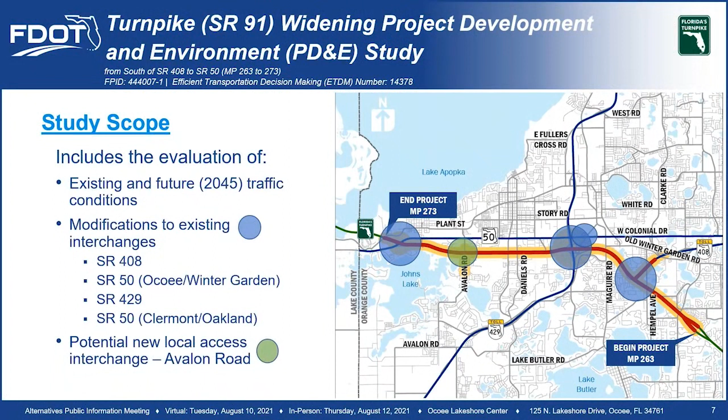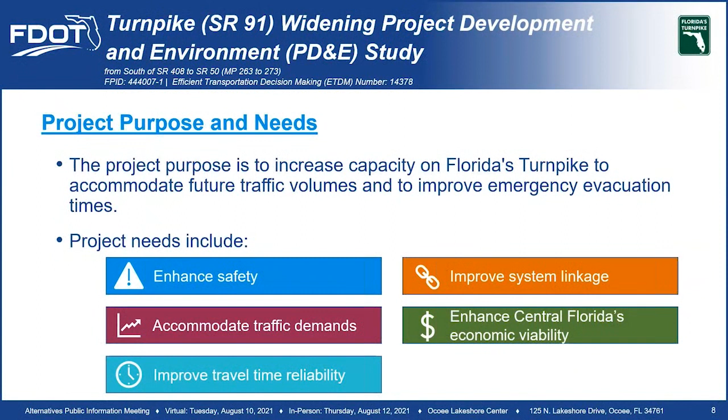The purpose of this project is to increase capacity on Florida's Turnpike Mainline from south of State Road 408 to State Road 50, to accommodate future traffic volumes generated by anticipated growth in Orange County and adjacent counties, and to improve emergency evacuation times. The need to improve this section of Florida's Turnpike is based on improving safety, accommodating traffic demand, improving travel time reliability and system linkage, enhancing Central Florida's economic viability, and enhancing emergency response and evacuation.

Now we will cover the proposed Turnpike Mainline widening improvements. The mainline improvements were broken into three unique sections.

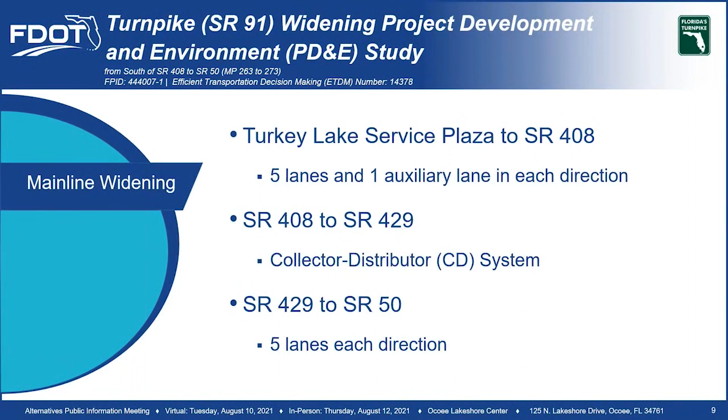The first segment extends from the beginning of the project near the Turkey Lake Service Plaza to State Road 408. The second segment is between State Road 408 and State Road 429. The last segment is from State Road 429 to State Road 50. The next slides will explain the proposed typical section for each segment.

The proposed improvements for the first segment from the Turkey Lake Service Plaza to State Road 408 include 5 through travel lanes and 1 auxiliary lane in each direction. There are currently 4 through lanes in each direction on this stretch of Florida's Turnpike, so the proposed improvements would add a total of 2 lanes in each direction.

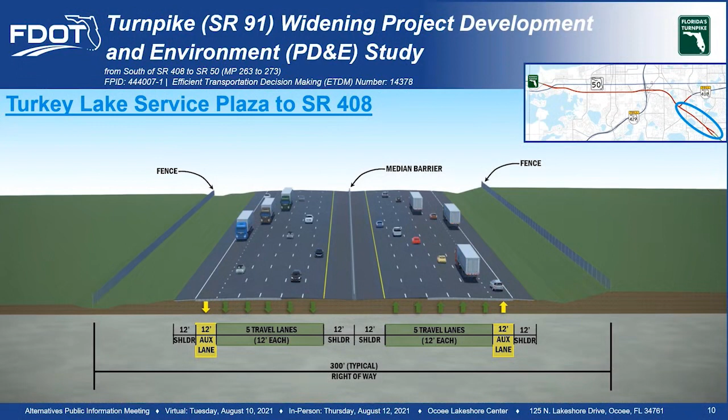For the second segment, from State Road 408 to State Road 429, a collector distributor or CD system is proposed. The CD system is a separate roadway facility that will parallel the Turnpike main line between the State Road 408 and 429 interchanges. The purpose of this separate system is to move the weaving movements associated with interchanges off the high-speed Turnpike main line, which will improve traffic operations and safety.

Traffic going to either State Road 408 or State Road 429 will use the CD system, which is comprised of an additional 4 lanes in each direction. These lanes will be barrier wall separated from the regular Turnpike travel lanes.

In addition, the Turnpike main line will be widened to 5 lanes in each direction to serve the regional traffic passing through this segment. For comparison, this section of Florida's Turnpike currently has 4 travel lanes and 2 auxiliary lanes in each direction, so the proposed improvements add a total of 3 lanes in each direction.

The next 4 slides will highlight the revised travel patterns associated with the State Road 408 to State Road 429 system and the interaction between the main line and the collector distributor system.

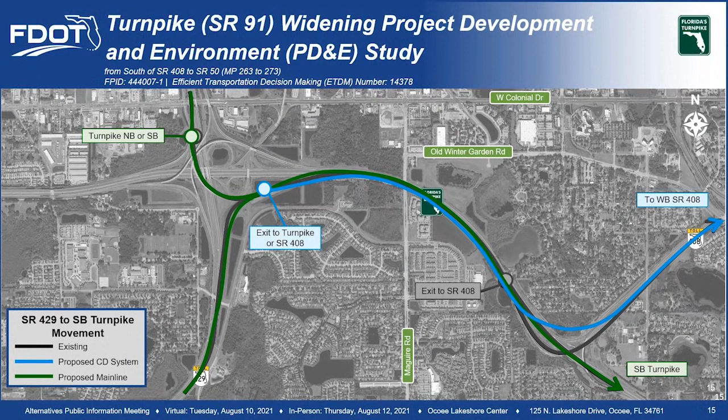This graphic highlights the physical improvement between State Road 408 and State Road 429. For more detailed information on the proposed improvements between State Road 408 and State Road 429, visit the project website to view the exhibit boards.

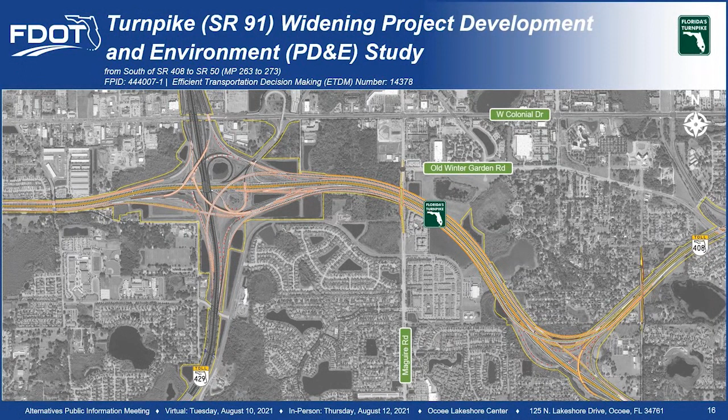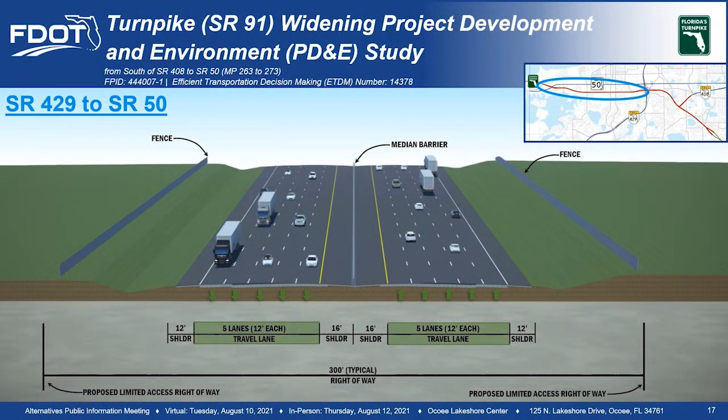The proposed improvements for the third segment, from State Road 429 to State Road 50, include 5 through lanes in each direction. There are currently 4 through lanes in each direction on this stretch of Florida's Turnpike, so the proposed improvements would add 1 lane in each direction.

Now we will cover the proposed interchange improvements. Interchange improvements are proposed at State Road 408, State Road 429, the State Road 50 connector, Avalon Road, and State Road 50. Starting with the State Road 408 interchange, the goal is to increase the capacity of the interchange, improve the safety characteristics, and accommodate the proposed collector-distributor system.

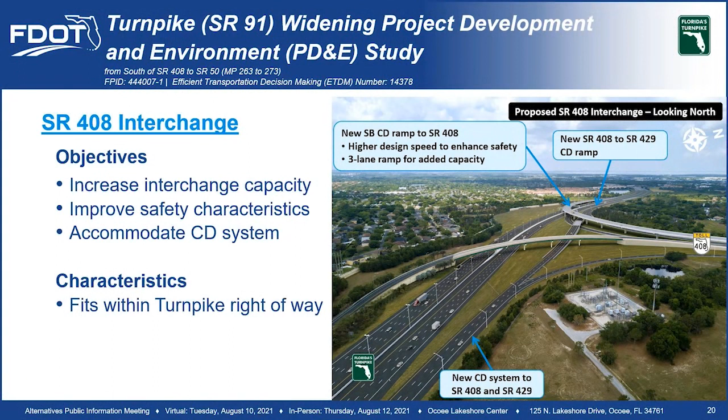The new collector-distributor system provides the necessary capacity to meet the future travel demand and separates the movements between State Road 408 and State Road 429, thereby reducing the number of conflict points and crash opportunities. For more detailed information on the proposed improvements, visit the project website to view the exhibit boards of the proposed alternatives.

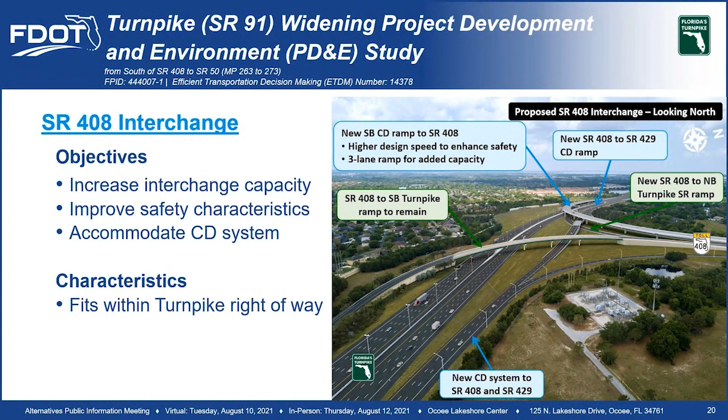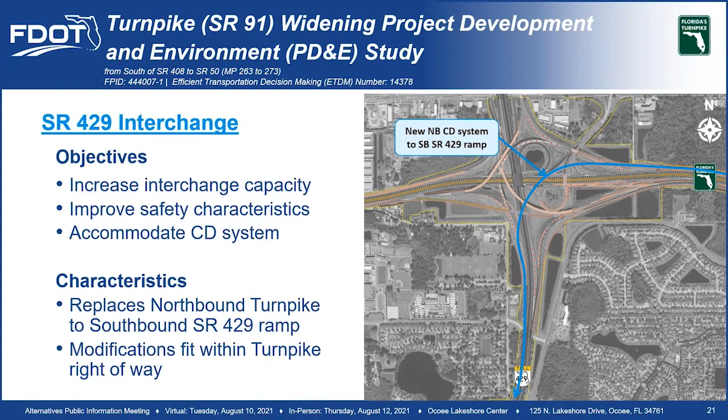Now let's review the State Road 429 interchange movements. Again, the study objective is to increase travel capacity and improve safety. The collector-distributor system accomplishes both of those objectives. The northbound Turnpike to southbound State Road 429 ramp will be reconstructed to provide additional capacity and to accommodate the proposed CD system. The proposed interchange modifications all fit within the existing right-of-way. Again, larger scale exhibits are available on the project website.

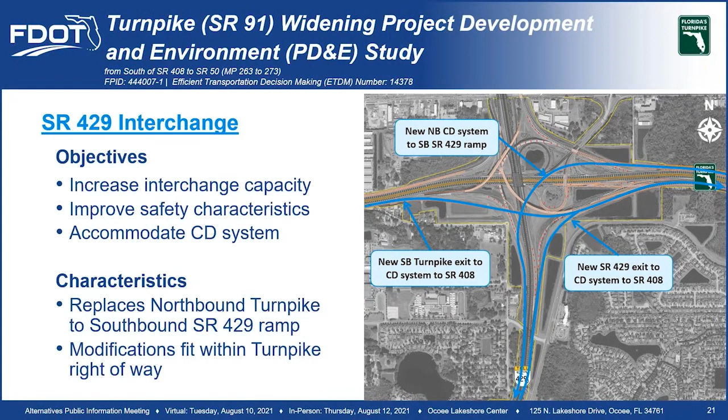2 alternatives were evaluated for the State Road 50 connector. One of the primary challenges with the existing interchange is the proximity of Marshall Farms Road to the eastbound exit. Option 1 essentially maintains the existing configuration and adds an eastbound right turn lane on State Road 50 to access Marshall Farms Road. The exit ramp is shifted to the west to increase the distance to the Marshall Farms Road intersection, and a new traffic signal will be installed at the ramp terminal.

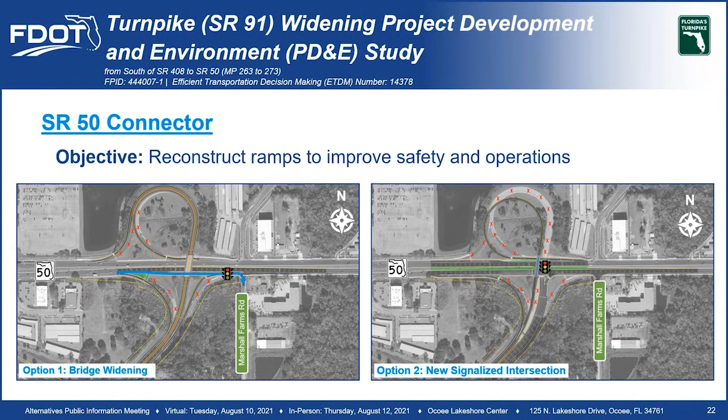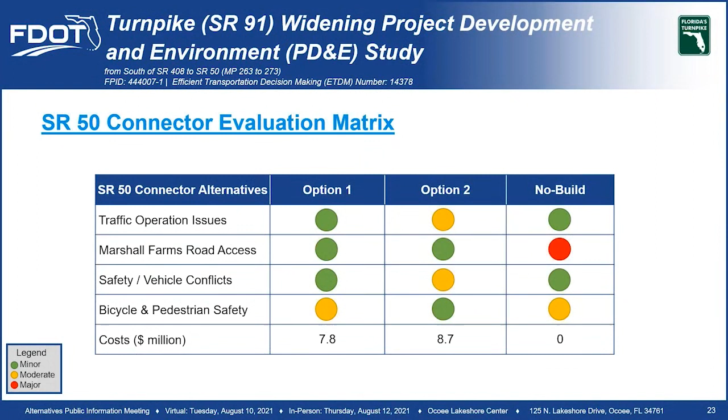Option 2 proposes a more comprehensive reconfiguration of the interchange and would result in a new signalized intersection. Both alternatives improve access to Marshall Farms Road compared to the no-build alternative. Overall, Option 1 provides acceptable operations and costs approximately $1 million less than Option 2.

New interchanges were evaluated at several locations between State Road 429 and State Road 50. It was determined that the new interchange at Avalon Road would offer the most value. An interchange at Avalon Road provides new access to West Orange County, and it will help to relieve traffic demand through the State Road 50 Clermont interchange. Improvements to Avalon Road itself are also included in the proposed alternatives, and those improvements require additional right-of-way. There are 3 viable interchange improvements as shown on the following slides.

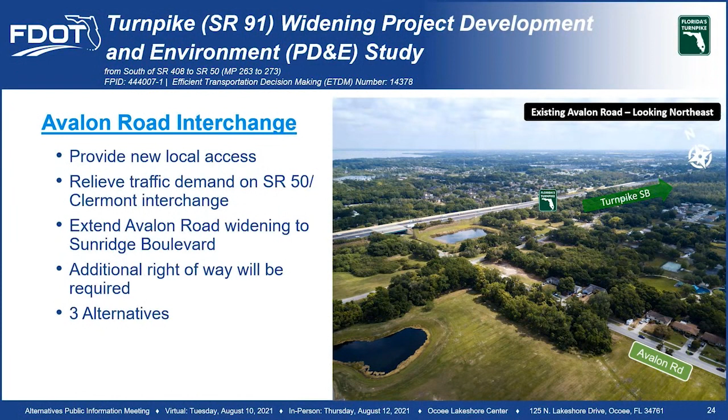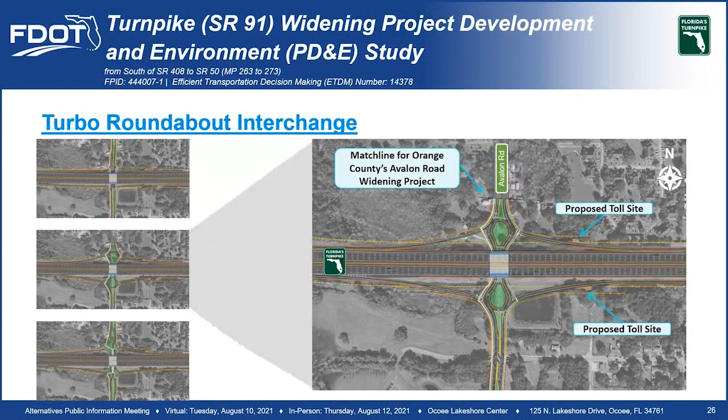On each alternative, you will see a match line for where the project ties into the Orange County Avalon Road widening project, which will widen Avalon Road to 4 lanes up to the State Road 50 intersection. The tight urban diamond interchange has the smallest right-of-way footprint of the 3 alternatives. The turbo roundabout interchange has a larger right-of-way footprint, as shown here. The diverging diamond interchange is very similar. As a reminder, large-scale graphics that show more details on the proposed alternative are available on the project website.

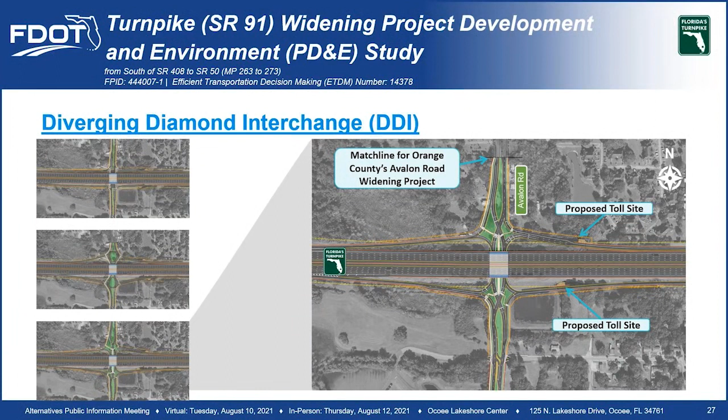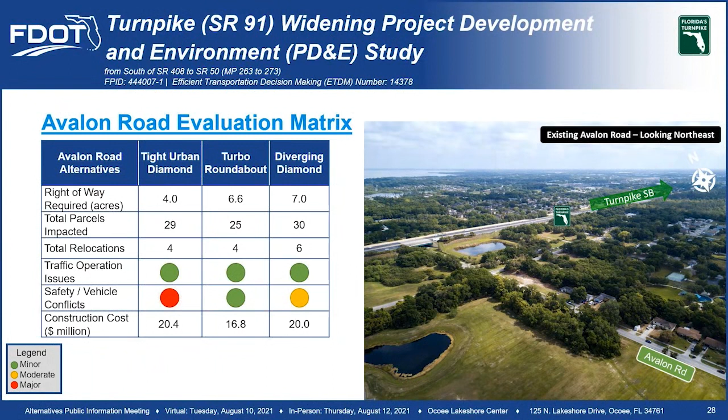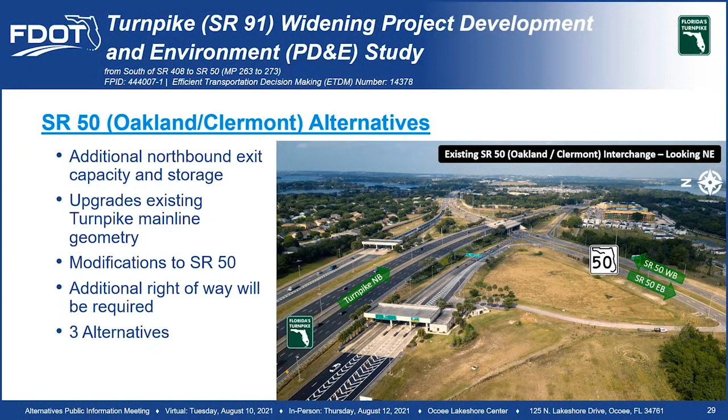The last interchange to review is the State Road 50 Clermont interchange. 3 alternatives were developed for this location and are explained on the following slides. All of the State Road 50 alternatives add additional capacity for the northbound exit movement, upgrade the existing Turnpike Mainline geometry, and require additional right-of-way.

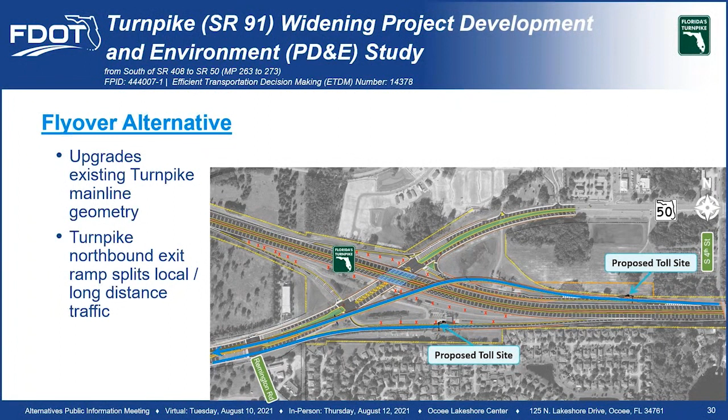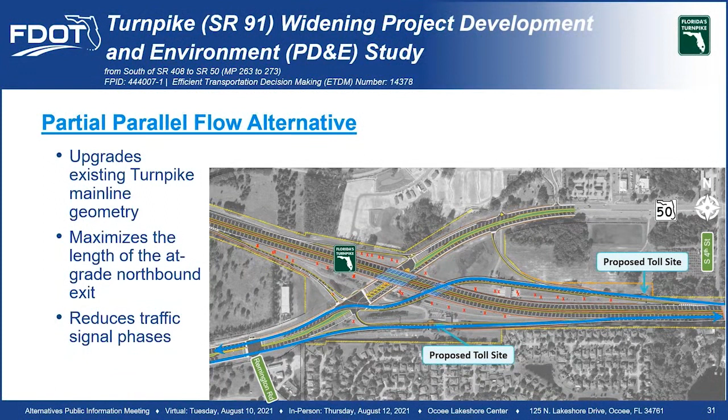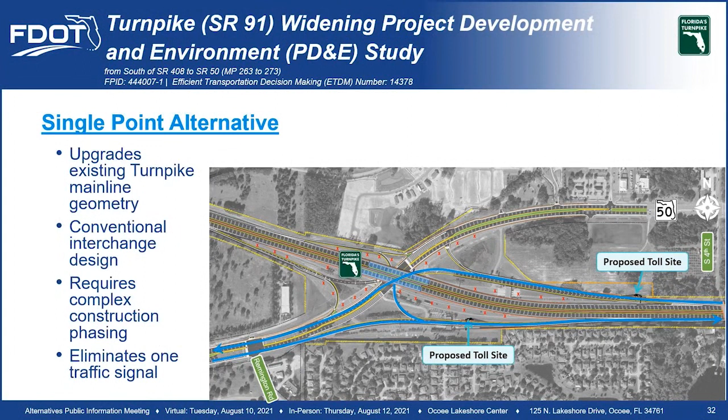This is the single-point urban interchange alternative. The benefits of this alternative are that drivers will be familiar with the function of the interchange, as it is a very common design, and one traffic signal is eliminated. The downside of this alternative is that it requires a very complex construction phasing.

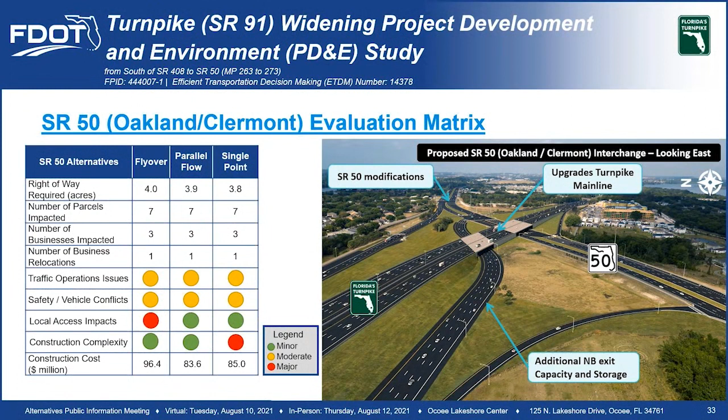Impacts that cannot be avoided will be mitigated. Public involvement is a very important part of the PD&E study process. Various outreach methods will take place throughout the life of the PD&E study. 3 public meetings will be held for this study. Today's meeting, the Alternatives Public Information Meeting, is the second meeting for this study.

The first meeting, the Public Kickoff Open House, was held in March 2020, and the third meeting will be the public hearing. In addition to the scheduled public meetings, other outreach methods include the distribution of newsletters, information posted on the project website, www.turnpike408-50.com, and other meetings with stakeholders and small groups. Florida's Turnpike Enterprise will continue to coordinate with local agencies located within the project limits throughout the study.

After tonight's meeting, we will review public comments in conjunction with the social, cultural, environmental, and engineering factors to reach a recommendation on a preferred alternative. The preferred alternative will then be presented to the public for input in spring of 2022, with the project ending in summer of 2022. Please note that the schedule is subject to change.